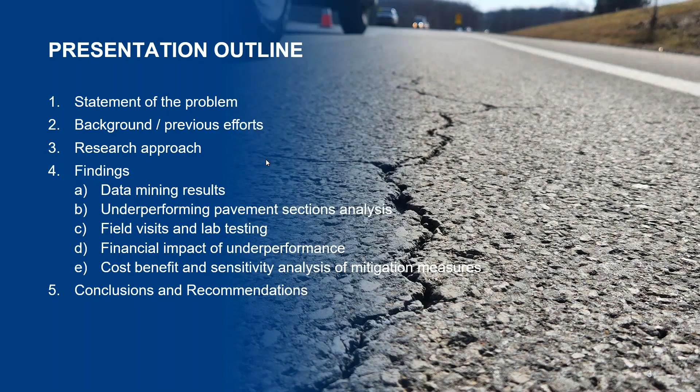ODOT expects its hot mix asphalt overlays to last around 12 years before reaching a PCR score of 60. District 3 on average reaches that point about 3.5 years shorter than the expected lifespan. This leads to significant performance loss, resulting in increased time and cost to maintain the network.

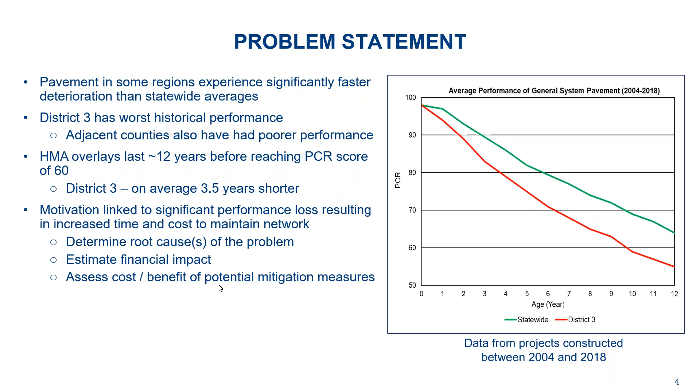So the objective of this research project is to determine the root cause of the problem, estimate the financial impact, and assess the cost benefit of potential mitigation measures.

ODOT uses a pavement condition rating system to assess the pavement condition, called PCR. It's a score from 0 to 100, and its value is derived from visual inspection.

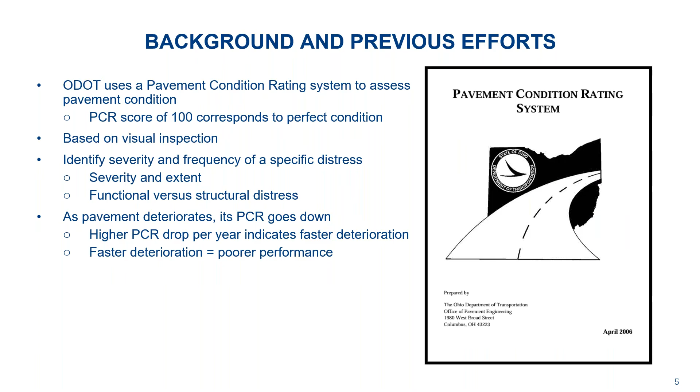The rater identifies the severity and frequency of a specific distress and records its severity and extent. The difference between functional versus structural distresses is also noted. As pavement deteriorates, its PCR score goes down, so a higher PCR drop per year indicates faster deterioration, and faster deterioration means poor performance.

ODOT has collected data over the years, and this data enables researchers to track PCR score and individual distresses, including both functional and structural. Those structural and functional distresses are shown in the table below. This is an example for a flexible pavement.

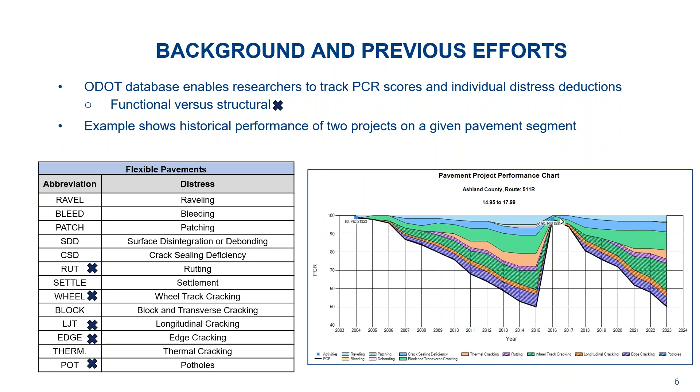There are 13 different distresses; some are functional, others structural. The example shown on the right is for a particular pavement section where both the PCR and distresses were tracked over its history. Here there are two projects performed on the given pavement and their performance after treatment.

District 3 has historically had a higher average PCR drop after activity 50, which is overlay without repair, and activity 60, which is overlay with repair. That's the primary rehabilitation treatment that ODOT performs.

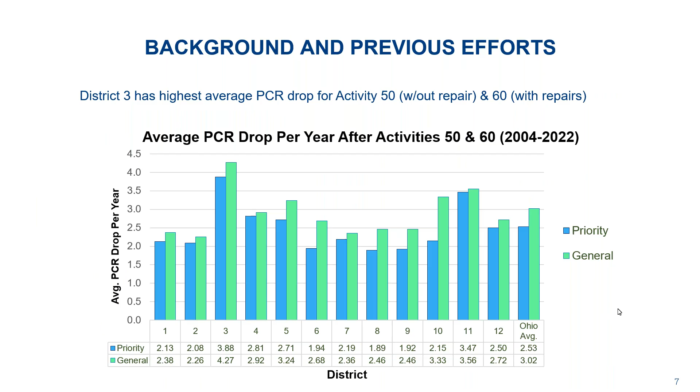This issue has been researched in prior projects. In 2006, statewide initiative 5 was conducted, and ODOT decided to move the District 3 asphalt mixes from Marshall design to Superpave design in an effort to minimize the use of poor quality gravel aggregate sources.

Aggregate quality was also found to impact pavement performance in other research projects conducted by ODOT. In 2017, the Office of Pavement Engineering conducted a review and found underperformance issues still exist, and an effort was initiated to set minimum virgin binder content to improve pavement performance.

In 2020, again the Office of Pavement Engineering review could not identify a correlation between performance and material suppliers. So a deeper dive into identifying the root cause was suggested, which leads to this research project being developed and executed.

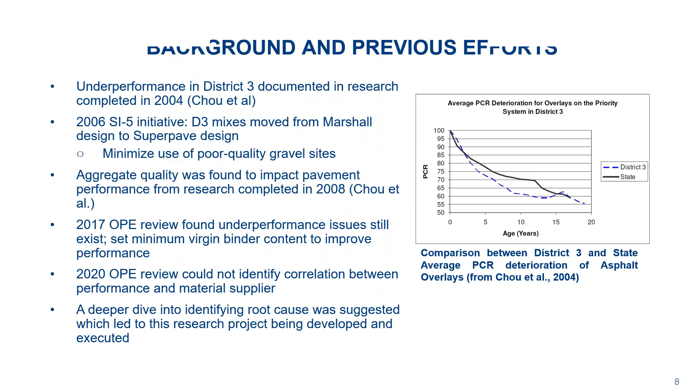Our research approach consists of the following steps. The first is to compile and organize data available from ODOT. This includes data from both the Office of Materials Management and Office of Pavement Engineering, such as pavement condition, PCR and distress, project history, treatment activity, and year the treatment was performed, and also roadway inventory data and material information such as job mix formula, producer supplier code, aggregate sources, and material quality data.

After the data were collected, data mining was performed to identify likely causes. We compared the data statewide versus a focused area of District 3, 5, and 11. We then verified the likely causes through forensic evaluations, coring samples and conducting laboratory testing. Geological investigation of aggregate sources was also conducted.

Then the financial impact of this underperformance problem was estimated. Mitigation measures were formulated and evaluated, and cost benefit and sensitivity analysis of those mitigation measures was conducted.

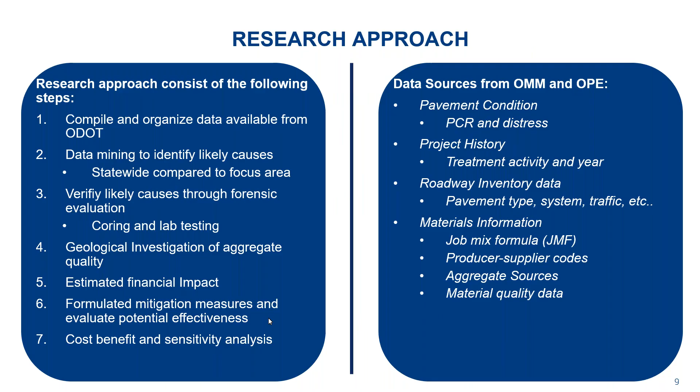So we're moving to research findings. In order to identify the poor performing projects, we set the criteria to look for average PCR drop greater than 4 points a year, and find pavement projects that have been in service for at least 5 years, because initially pavement could be not moving, not deteriorating, or some deteriorating very quickly due to some mismatch of the data.

Most projects we found that have a greater than 4-point drop a year are general system pavements, and very few are on priority system. So our focus was on general system pavement.

Some underperformance projects are also found in District 5 and 11, including Knox, Holmes, Coshocton counties, and very few projects in Western Ohio.

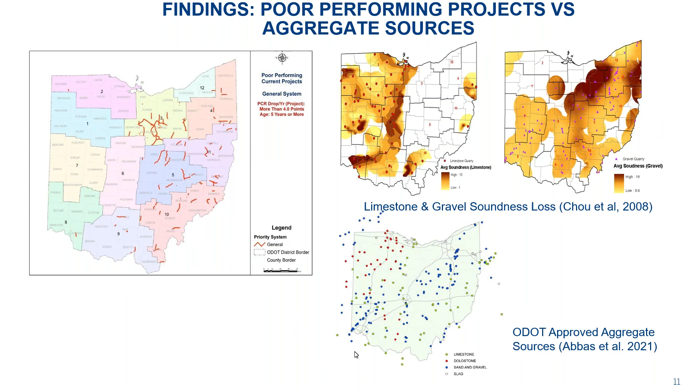Once we collected the data, we used multiple machine learning methods to perform the data mining exercise. The random forest method was identified to have better performance in terms of lower error in predicting PCR drop.

The random forest method is a decision tree-based method, and it provides a feature importance chart to tell us which parameters are most important in predicting PCR drop. The variables shown here are listed for data mining.

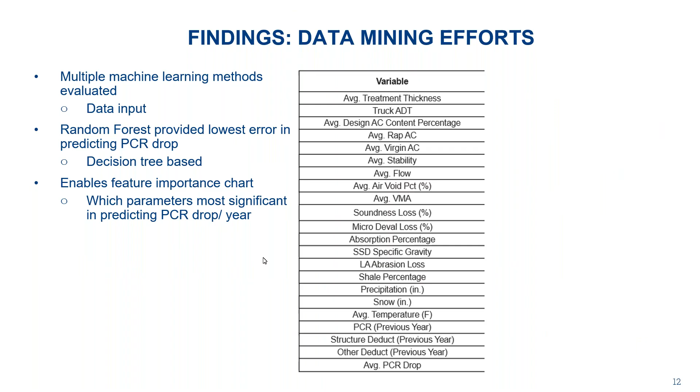Using the statewide data, this feature importance chart shows that the top parameters that impact PCR drop include specific gravity, microdeval loss, and LA abrasion, as these are aggregate-related parameters. Also ADT truck number, which relates not to the truck number itself, but the specification ODOT used for different truck numbers.

Then the third group is the year before the treatment, the structural deduct, the pavement condition, overall pavement condition, and the other deduct. These three are important in terms of the existing pavement condition.

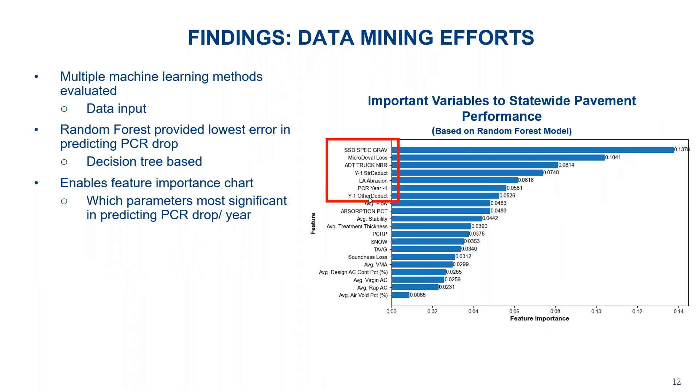When we use District 3, 5, and 11, different variables rise to the top. In this case, aggregate absorption becomes the top variable.

The other variables remained essentially the same, but in this case, specific gravity and microdeval loss dropped to a lower importance, because in this district there's no significant difference between the specific gravity, and a lesser difference in these microdeval loss values.

Aggregate absorption was measured at the aggregate source. However, because many aggregates may be included in a specific job mix formula, and multiple job mix formulas could be used in a project, it's difficult to actually connect exact aggregate absorption to the actual performance.

So the condition prior to the overlay treatment, such as the structural deduct and overall PCR, and even other deducts, remain important in predicting the performance after overlay treatment.

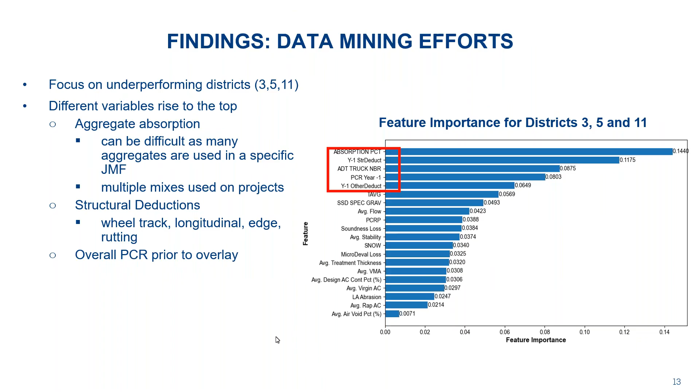Shown in the last column here, a couple of aggregate sources, such as 04202 and 4212A, the projects using aggregates from these two sources - 85% of those projects ended up being poor, or 11 out of 13, or 14 out of 18 - which seems to identify these aggregate sources as being of poor quality.

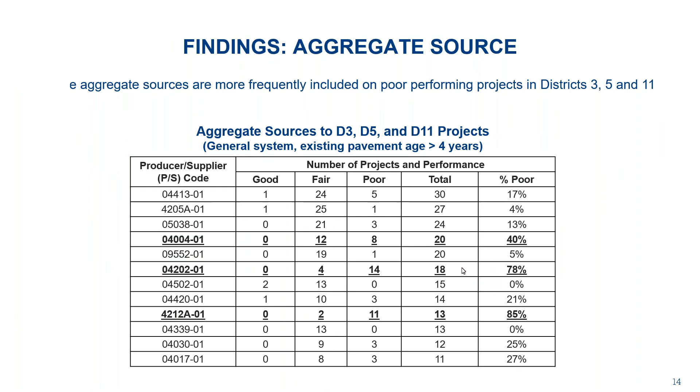But when we take a deeper look at it, this shows one of the sources. The performance seems to be impacted by where the project is located. As you can see here, projects in Huron and Morrow County, even though receiving aggregates from these two aggregate sources, their performance was not entirely poor. There was actually average performance with PCR drop between 2 to 4.

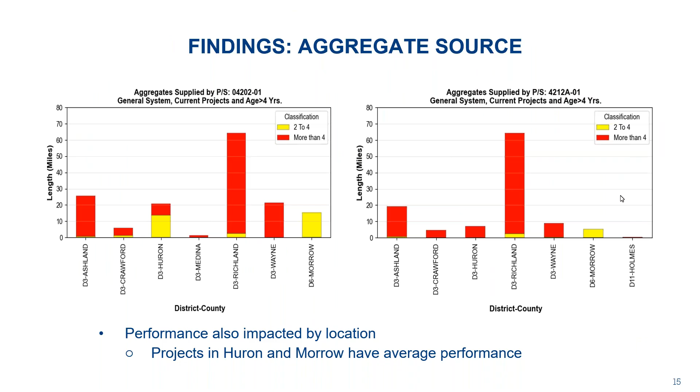So with that, we also did the field visit and testing and laboratory testing. I'll hand over to my partner, Katie.

Great, thanks, Eddie. In the next few slides, I'm going to give a high-level overview of the approach or methodology that we followed to select which pavements we'd go investigate further, given what we've learned up front on the data mining side, to then try to narrow down which sites we're going to target to go and do a deeper dive or forensic analysis.

Our primary focus was on general system routes, looking for pavements that had underperformance as defined by having a PCR drop of 4 or more points per year. The graph on the right side shows those roadways in red, mostly clustered within District 3 and those adjacent districts.

Now, some of the requirements we tried to keep in mind when narrowing down which projects we were going to select to do a deeper dive: we wanted to ensure they fell within those districts, that they had some sort of remaining service life and weren't just recently overlaid, targeting a 7 to 11 year-ish pavement life, and also wanting to avoid projects with short sections, so we could take multiple cores or sections along a project to get a better understanding of variability within a project.

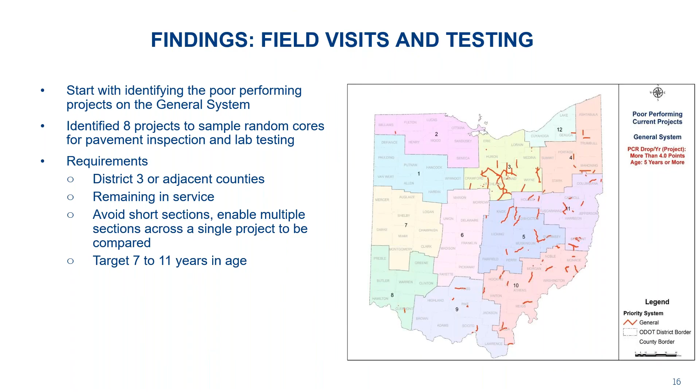With that, we narrowed it down to 8 projects that fell within 6 different contracts, if you will. They were predominantly in District 3, with 1 falling in District 5. They were a mix of flexible and composite pavements, and we looked at sampling at multiple locations within a roadway segment.

We looked for varying surface conditions that either aligned with the distresses from the PCR data to try to understand what was driving those scores, or maybe underperformance. We took cores, in total 12 from each project at 4 different coring locations, and then brought them back to the lab for further testing.

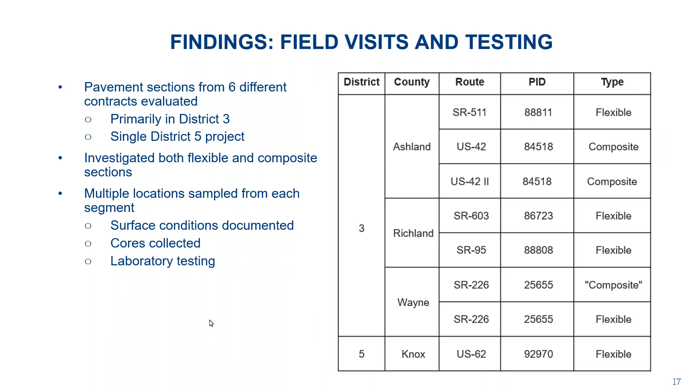There's a lot on this slide to unpack, but my goal is to highlight and walk through the 8-step process we followed when scoping out projects prior to, during, and following the site visit. The first step before stepping foot on the project was to evaluate the PCR before and after its most recent treatment, and look at variations across that project to understand what were the primary distresses given the highest deduct value in terms of your PCR score.

The second step was to review construction plans, trying to understand what were typical sections we should expect to see. Were there multiple different sections? Was there widening that took place during that most recent treatment?

We then looked at project JMF and material data and compared that against information received from ODOT, as well as paired that with any QC results available from those projects to try to understand variability during production. Step 5, we looked at evaluating any density data.

So if there were cores and density data available, or nuke gauge data, we tried to understand how well that pavement was constructed. Steps 1 through 5 all take place before even stepping foot on that project site. Step 6 is where we get into the field and document any distresses observed.

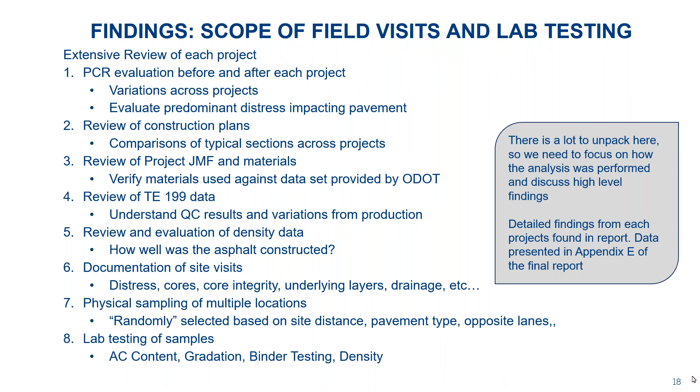Step 8 was taking those cores back to the lab, bulking them all first, measuring them, doing an inventory of those cores, and then subjecting them to a chemical extraction where we got AC content and then ran gradations after. There's a lot of detail there and certainly can all be reviewed in the final report, but I'm going to turn it over to Jason to talk a little bit more about some of the trends and observations that we found.

Thank you, Katie. First off, I'd like to describe how we took a very deep dive into the pavement condition ratings for each of those 8 pavement segments across those 6 contracts as part of the analysis.

So here's an example from a segment of State Route 603 in Ashland County. This is the segment from 7.48 to 11.57, a segment across the large stretch of pavement there in Ashland.

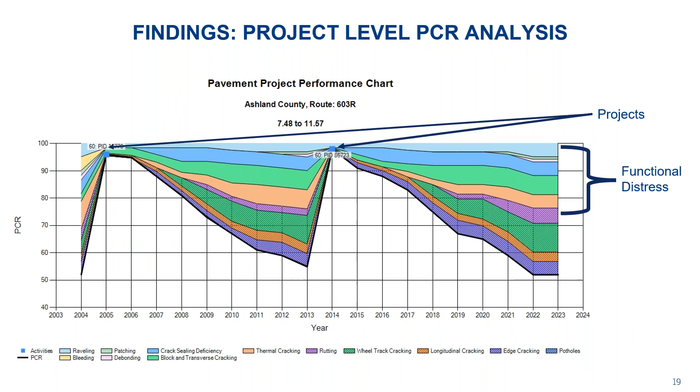Just some understanding around how we use this data and what we were particularly looking for. These are different projects that were constructed across this segment of State Route 603. We have an activity 60, which is an HMA overlay with repairs that was done in 2005, and then another project that was also delivered in 2014.

Now, between the 2005 and 2014 project, you can see the PCR score dropping over time as distress increases. In this case, Professor Chu mentioned we're looking at structural distress. Those are the distresses identified in the bottom portion of that chart. Notice they have the hatch there.

Those are distresses that, based on their description, are deeper into the pavement. They're contributing to distress in our newer overlays going on top, whereas some of the functional distresses identified with solid colors are going to be more related to the aging of the asphalt pavement, the sealing, low density, high air voids - distresses that are more typical to surface related distress.

So our first analysis was, let's really take a deep dive, understand how the projects performed, what distresses were progressing more rapidly than others, but also be mindful of what we built the existing contract upon. In this case, we had a very poor condition, again mid-50s, very high in structural and functional distress. And again, we didn't realize very good performance with this activity 60 constructed in 2014. It reached 60 only 7 years later in 2021.

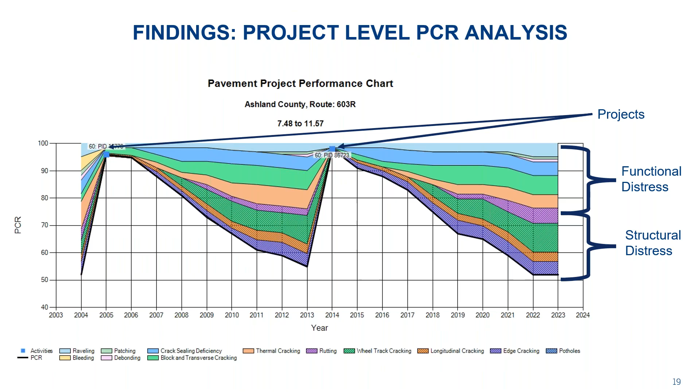Moving on, these projects were very large in length, and oftentimes had multiple typical sections as part of the construction. Just for reference, we'd like to show a project on State Route 511, also in Ashland County. That project had 3 typical sections. The first, highlighted in gray in the table, was an urban section.

It was a 1.5 inch pavement mill followed by a 1.5 inch, 9.5 millimeter, 446 type A overlay. The large portion of that project was typical section number 2, again very similar to section number 1, consistent 1.5 inch pavement milling prior to the 1.5 inch overlay going back on top.

The one of interest in this particular project is typical section number 3. We had approximately a 2.5 mile section towards the end of that segment. It called for variable thickness milling ahead of the overlay - that mill cut 1.5 inches deep at the center line. We removed more material out towards the pavement edge, up to 2.5 inches, so we took more material off across the width of that pavement. And then once that pavement was milled...

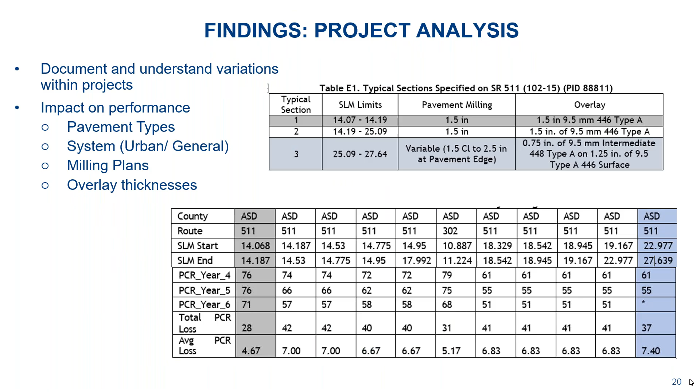Moving on, I'd like to share a couple of pictures and the cores that were collected on our field visits. Here's a picture that was collected from State Route 603 in Richland County. This was very typical of the distress that we saw on many of the projects we were visiting.

A lot of times we had transverse cracking, and you can see in the core pictures that these were typically full depth throughout not only the overlay activity 60 project we were investigating, but actually extended into the underlying layers. And if you notice the middle and right core in that bottom picture, there's no mix below the surface and the next layer, because that material was disintegrated and couldn't actually be recovered out of the core hole.

So just an idea of the existing pavement conditions that we're dealing with when we're looking at these activity 60 projects in District 3 and nearby.

We also saw a lot of issues with longitudinal cracking, particularly in and around the center line, typically associated with low density perhaps, and very commonly found to be top down, particularly in those areas. Again, this is an example from State Route 603 in Richland County.

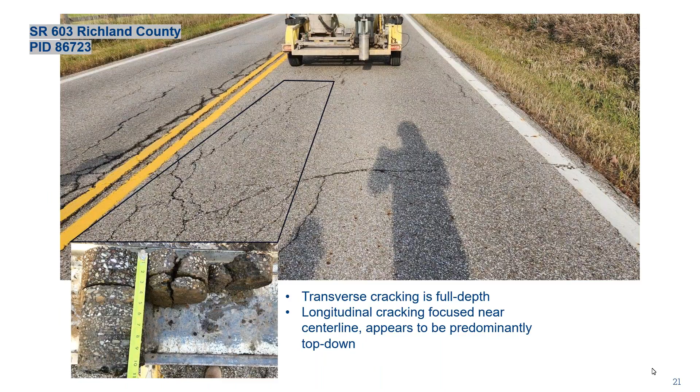Moving on, this is another photograph collected from State Route 42 in Ashland County. This is a composite pavement. This surface was originally placed back in 2013.

Another recurring observation we saw across many projects was debonding of the surface layer and intermediate layer from the underlying pavements. You can notice in the center core and the core on the right, we were not able to extract a full thickness flexible asphalt pavement sample above the concrete. Oftentimes the surface layer or new layers would debond. This impacts the structural performance of pavements long term, and can facilitate cracking in those new layers, both top down and bottom up. This was a recurring theme across the projects we visited, debonding a major issue.

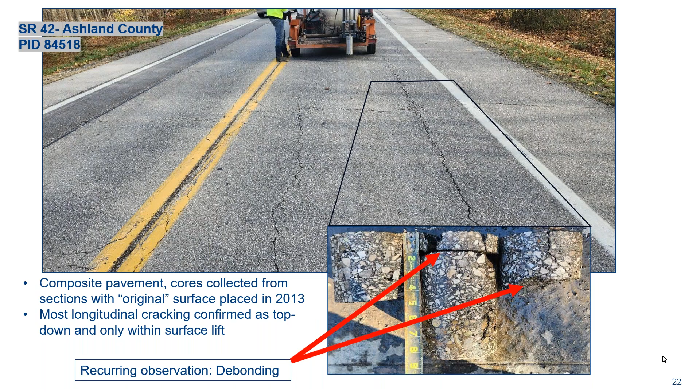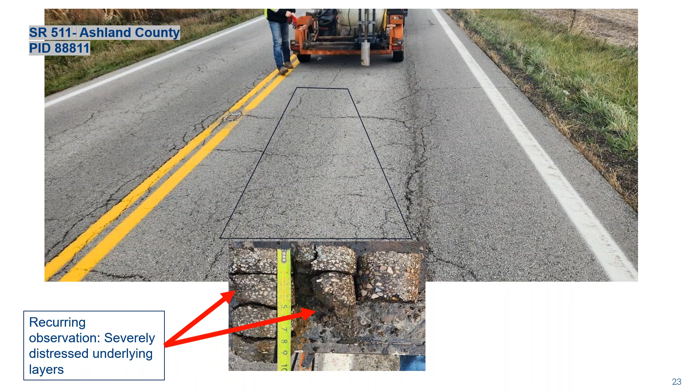Another recurring theme, and I think this is more of a sign of the times particularly when these pavements were constructed, is that longitudinal joints on these projects had a big impact on the pavement condition rating and performance.

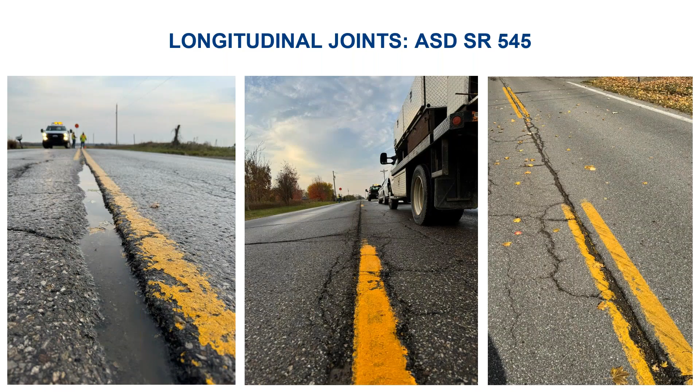Here is a shot from Ashland State Route 545. This is one of the additional pavements that was asked to be investigated as part of an addendum to the work. We can see the disintegration of that longitudinal joint, which enables water to enter the pavement. We all know water entering the pavement, particularly during freeze-thaw cycles, contributes to potholes and other distress. Again, another significant recurring theme across these projects is the poor quality of the longitudinal joints throughout.

Of the 6 projects we visited, a lot of them had similarities. 5 of the 6 projects, when constructed, had less than 60 PCR. Oftentimes the condition of the pavement could have been in the mid to low 50s, so a very distressed, poor quality asphalt pavement.

Despite the condition of that asphalt pavement, the amount of asphalt going on top of these pavements was relatively thin, often less than 2 inches, unless it was a case like 511 where there was a very thin intermediate applied. We're looking at anywhere from 1.25 to 1.5 inch surface typically applied on these heavily distressed pavements, oftentimes with some identification for full and partial depth repairs. We also noticed that when milling was prescribed in the contract documents, we didn't mill very deep into these pavements to remove some of the heavily distressed surface layers, the historically distressed intermediate and surface layers.

Typically we're looking at 1.5 inch milling or less, again not getting very deep into the pavement to eliminate some of that distressed material. As I mentioned with the instance of 511, even when we had slightly thicker asphalt overlays, that typically did not lead to improved performance. So I'm not sure the conclusion is that more asphalt gives more performance, especially when you're putting it on existing asphalt pavement that's heavily distressed.

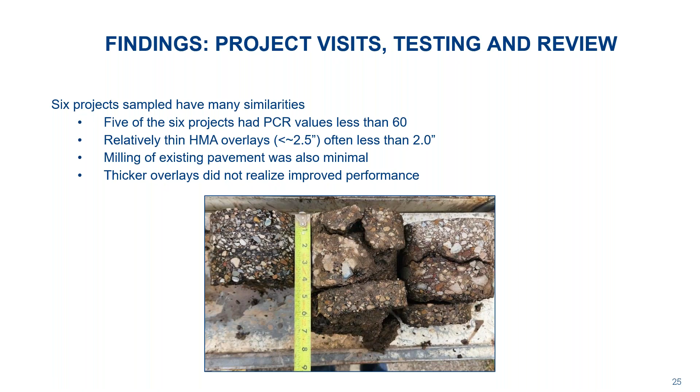We spent a lot of time reviewing the quality control data, both the field quality control data and the quality control data coming out of the QC labs. Starting with the field quality control data, we wanted to understand the quality of construction on these projects, and the best way, in my opinion, to measure that is to look at our density results and understand what the in-place air voids were on these constructed projects.

It is noted that 4 of the 6 projects we looked at followed 446 core density for acceptance of the surface lift, and for the majority of the lots across those 4 projects, they did realize a pay factor of 1 or higher. So they actually realized really good initial density, low air voids. But despite that, those projects actually experienced poor field performance.

It is noted that in 1 project, 1 segment, there was a deduction in density. And when we looked at the PCR versus that lot, we noticed again poor performance, a lot of functional distress related to low density, raveling, and other surface related distresses.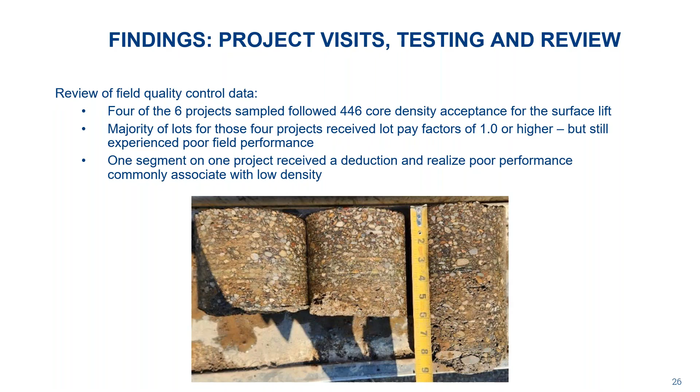We spent a lot of time digging into the quality control data for each of these projects so that we could compare the results to the lab testing done after retrieval of the field cores.

The first thing we wanted to understand was whether there was agreement based on the QC data, where we took the lot and tied it back to the location so we could match the QC lot data to the core collected from each project.

One finding I thought was very interesting was the AC content typically reported in our TE 199 results. We had very good agreement when it comes to asphalt content from our extractions for those recovered cores, and I make that comment despite the difference in test methods.

We were doing a chemical extraction of those cores to measure asphalt content. I would say the biggest surprise we saw in comparing the quality control data to the results of the field cores collected and tested was in the aggregate gradation results.

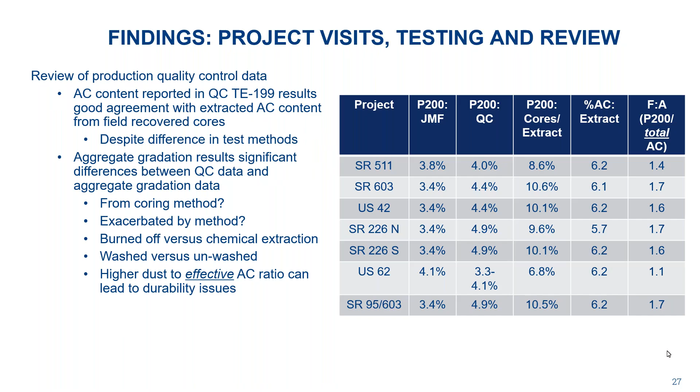So this definitely raises some questions, and we'll be coming back to it in our recommendations later on.

For the projects we looked at, a recurring theme is that the immediate past project also realized underperformance. Based on this, we're suggesting that the Activity 60 treatment selected here is not thorough enough to address some of the underlying issues.

Those distresses are probably heavily impacted by the underlying condition of the pavement—you just can't address all the existing issues that remain by picking and choosing areas for full depth patching.

So probably a more permanent solution might be best for long-term performance.

Particularly in District 3, we did not see any maintenance or preservation on these roadways whatsoever. Something as simple as crack sealing can really help seal up cracks as they develop, keep water out, and help minimize distress.

We did not see any of that on the projects we sampled in District 3.

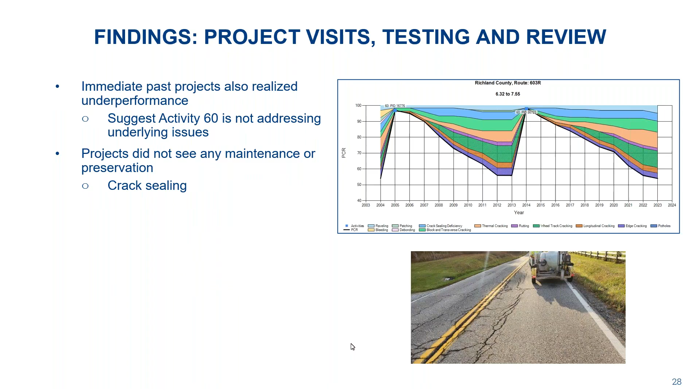I'm going to turn it back over to Dr. Chu to discuss the financial impact of the underperformance realized in these areas.

Thank you, Jason. So we looked into what the financial impact of this underperformance issue is, in order to quantify the scale of the problem.

We calculate the financial impact by multiplying the length of pavement section by the increase in equivalent annual cost, which is expressed based on whether a pavement is shorter than a 12-year expected life.

If it's a pavement section that lasts less than 12 years, it will incur some financial loss.

It's also proportional to the number of miles of underperforming sections in each district, and it's also influenced by the district-wide average rehabilitation cost.

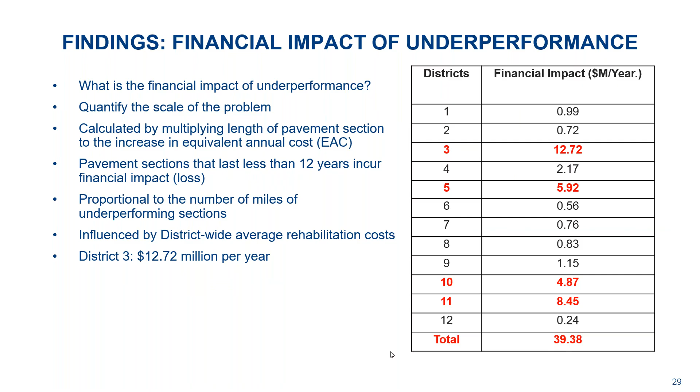It's about close to 12.72, or close to 13 million a year—about one-third of the loss came from District 3 alone.

So a deeper pavement treatment, as mentioned by Jason, could reduce the impact of existing underlying distress on future overlays. A deeper mill and fill strategy could be considered. This includes removing existing distressed and unbonded layers, and includes full depth repair if warranted. Other technologies such as full depth reclamation or cold in place recycling could also be considered. ODOT has recently performed full depth reclamation.

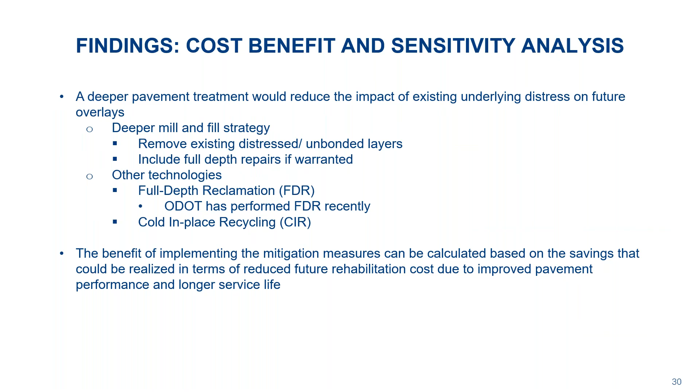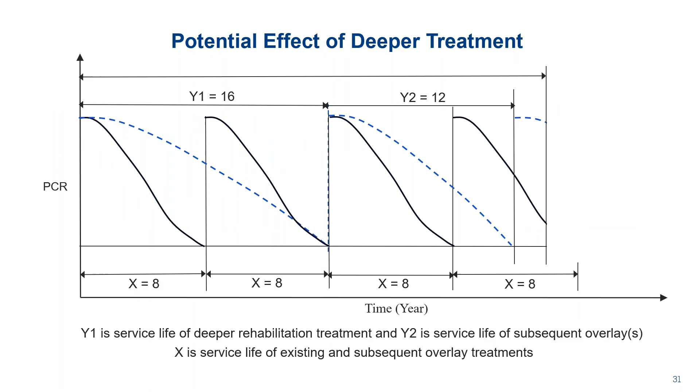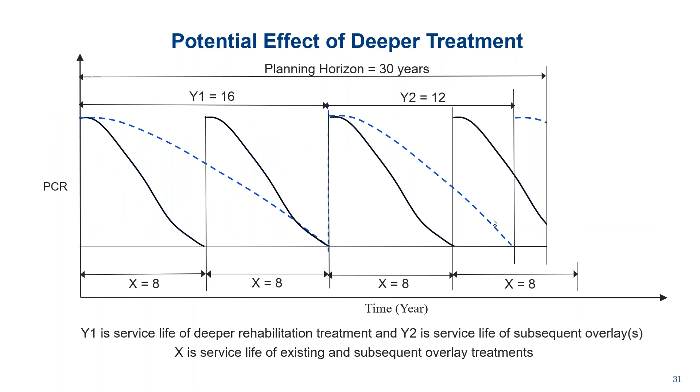Given an estimated total planning horizon of 30 years, we can see only a little bit over 2 treatments would be required versus more than 4, or about 4 treatments would be required.

Given a longer planning horizon, such as 60 years, it will be equivalent to 3.67, which means given the average activity cost statewide is about 220 grand, if we multiply that by 2.42, the break-even cost of deeper treatment for a 30-year planning horizon is about 532, which means if the cost of the deeper treatment is less than this, it will be justified. And for a longer planning horizon, you could even justify a higher cost.

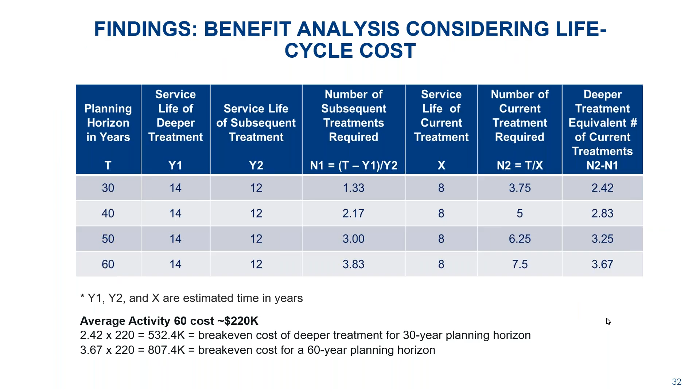So with that, I will return that back to Jason.

Thank you, Dr. Chu. Here at the end, we're going to go through the 8 recommendations that the research team offered to the department based on the findings of our research effort. So let's go ahead and get started.

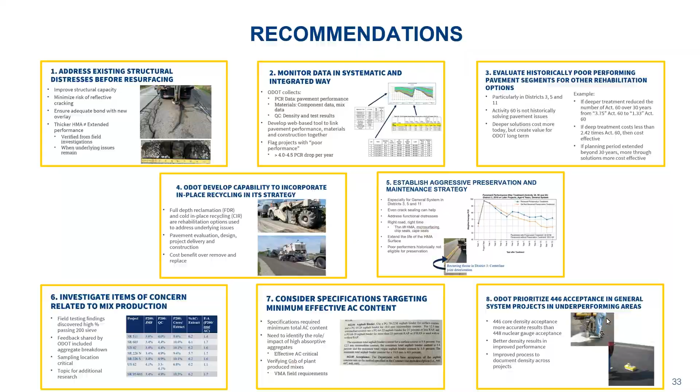Recommendation number 1 is where applicable and where economical, let's try to address existing structural distresses before any asphalt overlay resurfacing. Again, this goes back to trying to identify and remediate any of the underlying distress, stripping, cracking that is occurring in the existing pavement structure. Let's try to minimize the impact of that distress from reflecting or contributing to the performance of our brand new asphalt overlays. And with that, let's be very mindful that we are getting an adequate bond with our new overlay.

That's best practices when it comes to cleaning milled surfaces, eliminating any scabbing that happens from the milling process, and applying adequate tack coat. Let's get good bonds so that we're not getting any debonding, and that we're able to actually transmit the stress and strain of our traffic all the way throughout the depth of that asphalt pavement layer.

We make this recommendation with the fact that even though we might have slightly thicker HMAs, that did not lead to extended performance based on some of the field investigations that we had. So let's try to address those underlying issues where they remain, again, to give our overlays the optimal ability to perform over time.

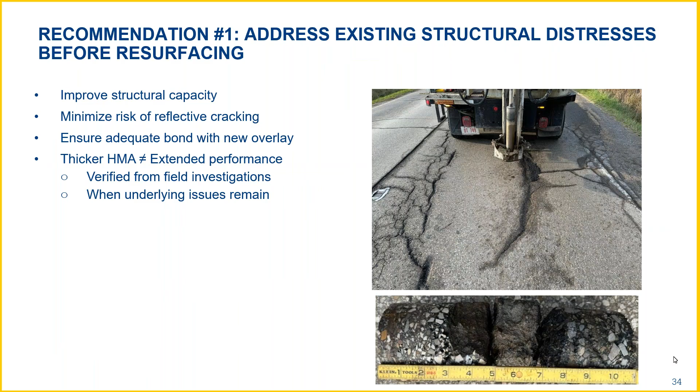Recommendation number 2 is based on the process in which we were able to take all the data from the different offices, pavement engineering, materials, quality control data from construction. And our recommendation is actually to monitor data in a systematic and integrated way.

Within the research and development, we've put the framework recommendation together to develop a tool that can actually link pavement performance together with material input data, as well as construction information, together in one place. This would help ODOT and future researchers identify projects that have poor performance, and you can really aggregate the material tied with it, including JMF information, material source information, quality control data, really to help understand other impacts on pavement performance long-term in a much easier and facilitated way with the amount of great data that ODOT's collecting.

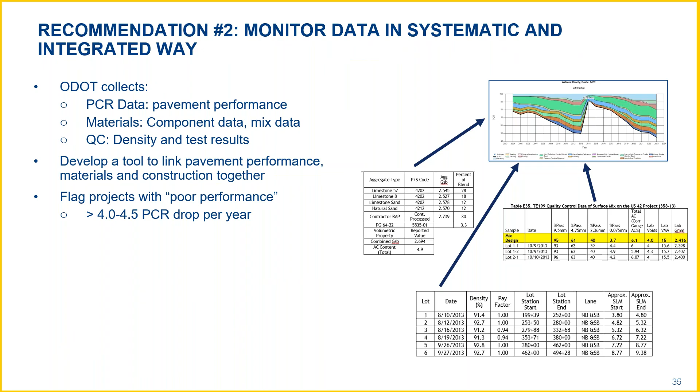Our third recommendation, again based on the analysis Dr. Chu just went over, is let's evaluate our historically poor performing segments. Those pavements with previously poor projects or even multiple previous projects, let's consider those for deeper rehabilitation options, particularly if the structural distresses are coming back relatively quick, 5, 6, 7 years, particularly in these areas of focus, District 3 adjacent to District 5, as well as District 11.

We've realized based on this project analysis that Activity 60 is not adequately solving all the pavement issues, so maybe deeper solutions, although costing more today, create value long-term for ODOT, especially if we get better long-term performance of our overlays, minimize the construction cycle, get those asphalt overlays to last up to 12 or even more years if possible.

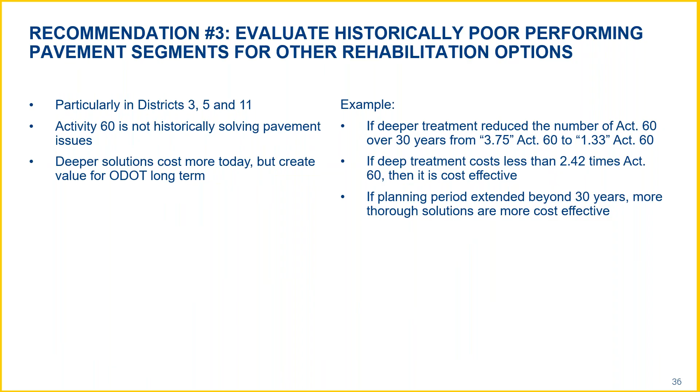One of the tools that may help ODOT realize that is both full depth reclamation and CIR. We did acknowledge deeper mill and fills as one option, but these technologies, full depth reclamation and CIR, are rehabilitation methods that can be used to address underlying issues.

FDR will go through the entire thickness of a flexible pavement. We can grind that pavement up. We're going to stabilize, glue that back together, eliminate any distresses, cracks, stripping issues, and provide a solid foundation for our asphalt overlays going on top.

CIR is very similar. We're going to use a modified milling machine, go anywhere from 3 to 5 inches into the pavement, mill it up, add a stabilizing agent, pave it right back in place. Again, that's to help with some of the distressing in the underlying layers before we put our asphalt overlays on top. We offer these suggestions with the realization that there is a cost benefit with these technologies versus removing and replacing the materials on site with all new imported material.

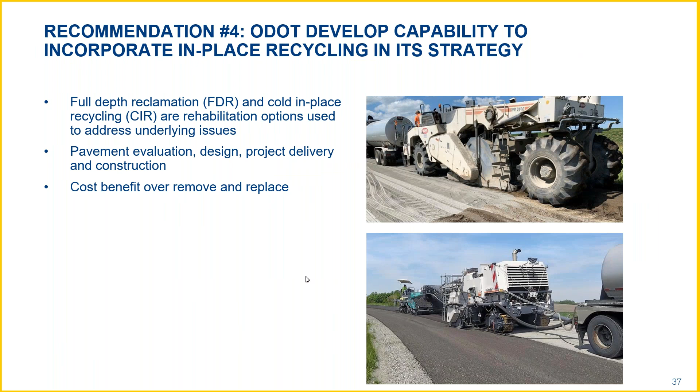Our fifth recommendation is to actually establish a pretty aggressive preservation and maintenance strategy. I offer that particularly in District 3. Something as simple as crack sealing can make a big difference when it comes to performance.

Again, centerline joint deterioration is a pretty widespread issue across the district on the pavements we looked at. There are other material solutions around the centerline joint to help minimize that distress, water intrusion that can severely negatively impact the ability of that pavement to perform.

A little later on in life, we can put some topical treatments on these asphalt overlays, whether that's an ultra thin overlay, depending on the traffic volume, could be anything like a chip seal, maybe it's a micro surfacing. Again, applied at the right road at the right time, really to extend the functional life of that asphalt overlay.

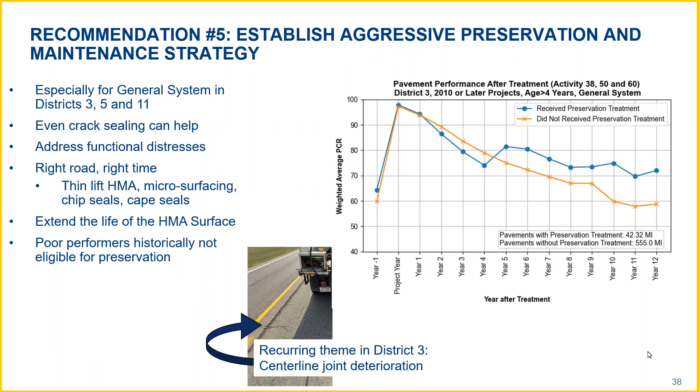Typically here in District 3, we learned that these pavements were performing so poorly they actually couldn't get into that preservation queue, if you will, because they were dropping so fast. So I think we can solve some of the distress issues, build a good overlay, get a preservation strategy put together, really extend the life of the pavement, and get much longer life out of our HMA overlays.

Number 6, we recommend ODOT take a look at the issue of concerns when it comes to mix production and aggregate gradation data. This again ties back to the finding where we had much higher fines content versus the quality control reported data and the JMF based on our field investigations.

We also heard some feedback, particularly from the district materials lab, that it would not be uncommon for density cores being sent back to the lab to show visible aggregate breakdown in those cores. Might be over compacting, damaging the aggregate structure and in turn the performance.

So we highly recommend taking a look to really understand what's really happening. Maybe this was an anomaly occurrence based on the sign of the times, but I think this is something that can directly impact durability of an asphalt pavement. So putting a project together where we look at sampling location, the test method to understand what the percent passing the 200 is, and really getting fines to effective asphalt dialed in production, I think could help shed some light on the durability issue with some of these areas and projects.

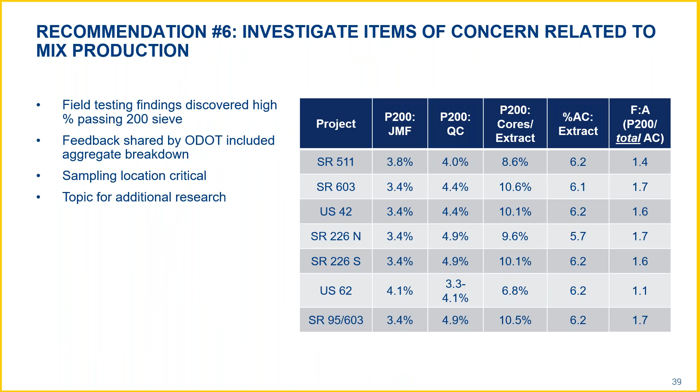In light of the fact that we're dealing in an area with high absorption, particularly in the southern end of District 3, we also recommend ODOT consider specifications targeting not total asphalt content, but rather effective AC content. This would help the department and contractors use aggregates in a little bit different way. If it's a higher absorptive aggregate, it's going to pull more asphalt content into the pores.

That results in less asphalt around the particles, thinner films to glue the aggregates together. They're going to be more prone to accelerated aging, and in turn, the functional distresses that come with that: raveling, top-down cracking. So looking at the impact of absorption in both the JMF and production is recommended.

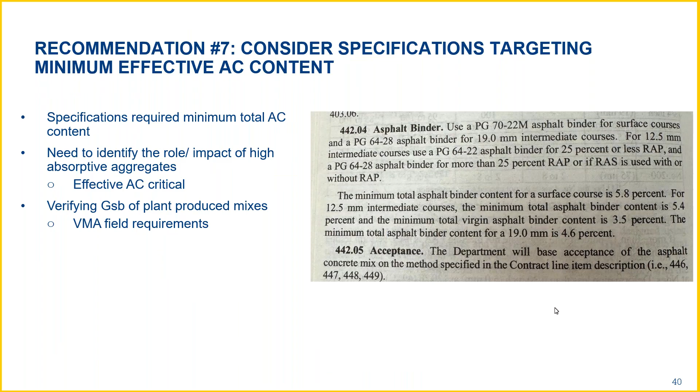We also make the note for ODOT to consider verifying GSB of plant-produced mixes. We recognize that they've made some improvements in specs recently on VMA field requirements. It may be worthwhile to also verify some of the GSBs to understand variability of aggregate-specific gravity and absorption during production.

Our final recommendation is to prioritize acceptance testing on coring rather than nuclear gauge, particularly in these underperforming areas. It's much easier to track data based on cores rather than gauge. We recognize holistically as an industry that better density gives improved performance, and this would make it easier to understand how the asphalt pavement was constructed, putting better lab numbers around that rather than relying on the nuclear gauge for density documentation.